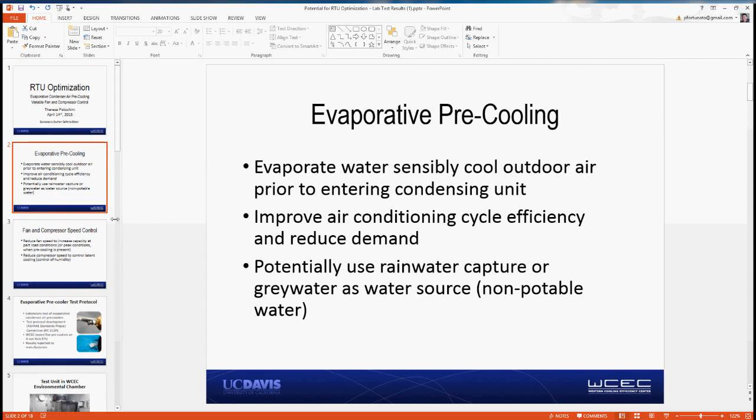Thanks, okay, next slide. So I'm sure most of the audience is familiar with evaporative pre-cooling, but just in case, evaporative pre-cooling is using water to sensibly cool outdoor air prior to it entering the condensing unit. Dropping the temperature of the air to the condensing unit improves air conditioning cycle efficiency and, most importantly, reduces peak demand.

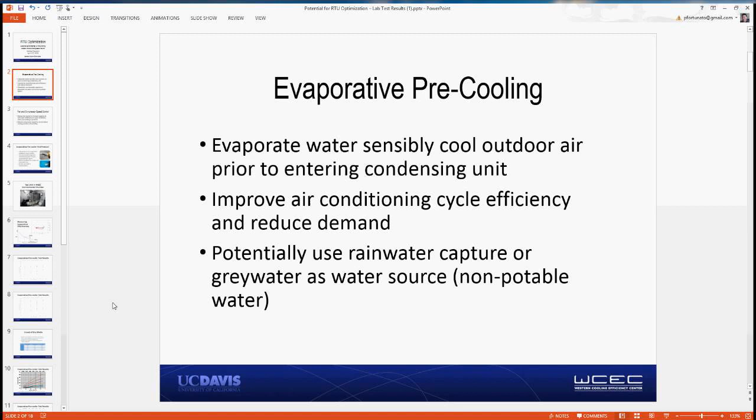There obviously in California is a lot of discussion concerning water use. And so I also just want to point out that we are doing research separately from what is being presented today on potentially using rainwater and gray water as water sources for evaporative cooling to lessen the potable water burden.

Separately from the evaporative cooling research, we have been working on a project in fan and compressor speed control for rooftop units. If you adjust the blower speed on a rooftop unit, you can—now I find a typo right here—as you reduce the fan speed of your blower, you decrease the capacity of the unit at part load conditions.

Now, if on peak conditions, you can also implement pre-cooling, you can potentially control both your fan speed; you can essentially achieve this reduction at peak conditions. And it's even more important that you can control your fan speed when you have a pre-cooler present to achieve all the benefits possible.

If you can also control your compressor speed, we're going to show that you can then also control your latent cooling. Now, in dry climates like California, what can happen is as you reduce your fan speed in an effort to reduce your system capacity, you can also increase your latent cooling, which is essentially unnecessary in our climate.

So what this project was about was looking at how you can control both your fan speed and your compressor speed to optimize your efficiency. And then we're also now considering what the potential would be if you could combine both of the technologies. So I'll go through all of our project results so you can see what that potential is.

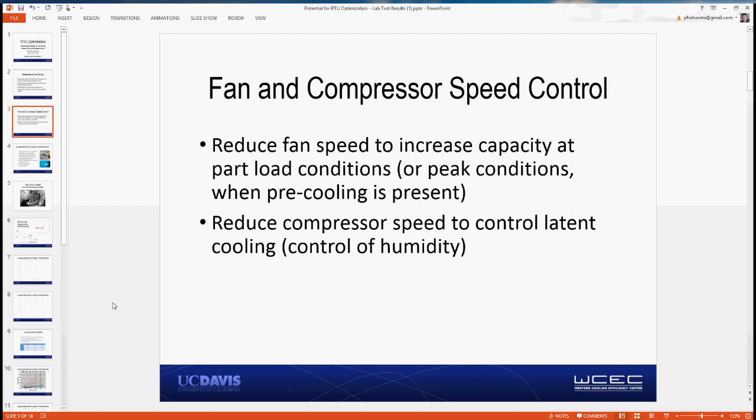Another one of our main objectives in testing evaporative pre-coolers was not just to test evaporative pre-coolers, but to define a test protocol that could objectively compare them in the laboratory. The laboratory is not perfect, and we can't look at everything one could look at in the field, but we envision it as a first cut where you could ensure a pre-cooler is going to provide the performance you need before you get out into a bunch of field installations.

Our director at the WCEC, Mark Modera, is the chair of an ASHRAE Standards Project Committee, SPC 212P, which is developing an evaporative pre-cooler test protocol.

We essentially developed a test protocol and then tested 5 pre-coolers on a 4-ton York rooftop unit in our environmental chamber in our laboratory, basically as a way of verifying the test protocol itself. As part of participating in this project, we tested equipment from 5 manufacturers, and then we provided the results to the manufacturers as well.

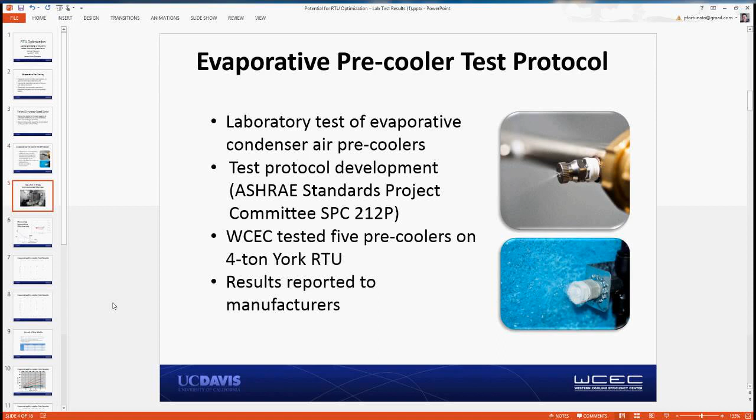So this is the rooftop unit we use for all of our testing. As I mentioned, it's essentially a brand new York 4-ton rooftop unit. I don't know if there's much else to say about that. It's installed in our environmental chamber here.

We were essentially measuring capacity of the unit - basically measuring airflow rate and entering and exiting temperature and humidity of the supply airflow and the unit power, so we're able to determine efficiency of the unit. We can also control our environmental conditions within 1 degree Fahrenheit on both wet bulb and dry bulb, and we run our steady state tests for a complete hour. So we have extremely controlled conditions coming into our environmental chamber and on the return air to the unit.

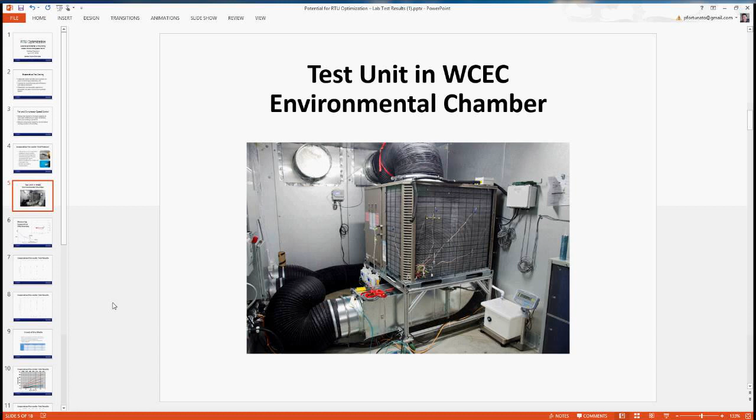Often there's no practical location between the pre-cooler and the condensing coil to actually measure that temperature. And the temperature distribution may be highly variable - so where do you place your sensor? How many sensors do you need? How do you prevent them from getting wet? Because if they get wet, all you're measuring is the wet bulb temperature. So we were essentially looking for a better way than to try and measure that temperature directly.

Another option you can look at is the exhaust condition, because if you can measure the exhaust condition, which is much more realistic, you can essentially measure the humidity ratio and then calculate what the pre-cool condition was in order to achieve the exhaust condition that you measured. So we did use that method.

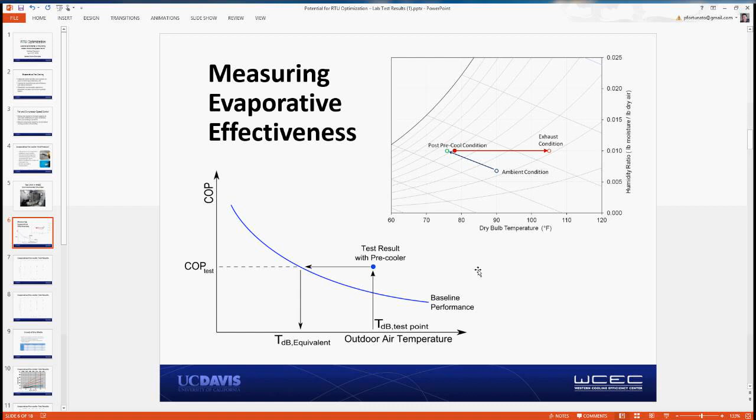These are the results of the water use effectiveness, which is basically the amount of water that would be required to get the pre-cooling delivered if you used every last drop, divided by the actual amount of water used. In all these cases, for any product that required a bleed rate, there was no bleed implemented in the lab. Pre-coolers 3 and 4, for example, are products that would generally have a bleed in the field, so they showed the highest water use effectiveness here, but we're not accounting for the bleed rate they'd require in the field, which may increase water use 10 to 30%. The other 3 products were once-through spray products and don't require any bleed, so they had water use effectiveness on the order of 30 to 80%.

One more thing to consider is that if any media is used, you may run into situations where your air conditioning cycle is running but the pre-cooler is not, which could happen at outdoor air temperatures around 75 degrees. It's probably less of an issue for units with economizers available, but it's something to be aware of. So we did an impact test, running the unit with the pre-cooler dry at 75 degrees Fahrenheit, and looked at the impact on power, capacity, and COP.

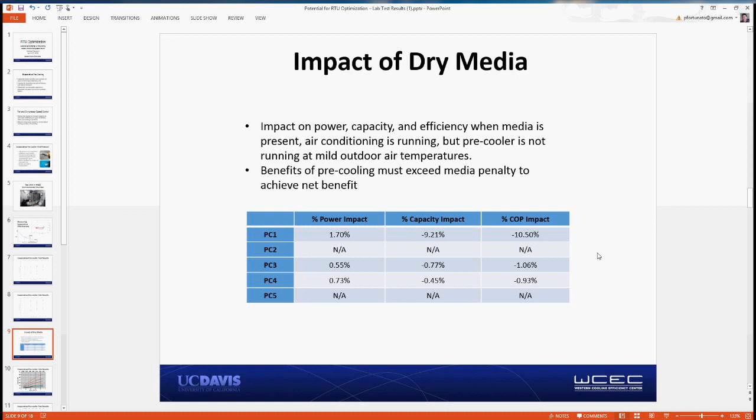Two of the products, pre-coolers 2 and 5, don't have any media in the system, so this test isn't applicable to them. Pre-coolers 3 and 4 had very little impact from the media, and the first pre-cooler was the only one that showed any significant impact. Even so, you have to consider whether the pre-cooling benefits at peak conditions exceed the media penalties at these cooler temperatures.

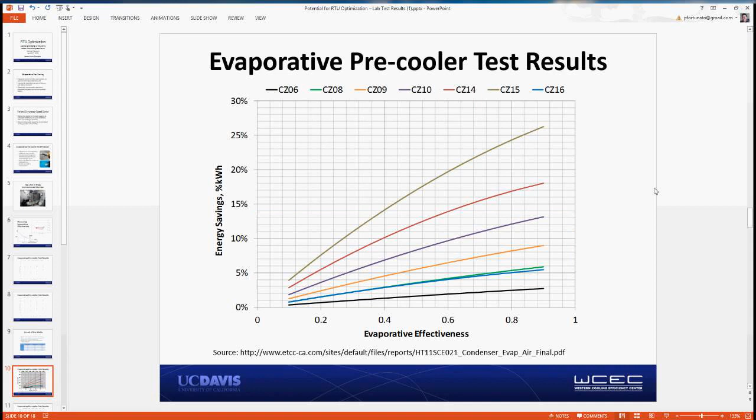I wanted to talk a little about what an evaporative effectiveness of, say, 60% means. This was a pretty detailed analysis and I can't go through all the details, but I included a link to a previously funded SCE project on the ETCC website that describes this model. Basically, we looked at various Southern California climate zones and the cooling loads in those zones, and estimated the percent energy savings achievable based on varying pre-cooler effectiveness.

If we consider that in Southern California, climate zones 9 and 10 are the most highly populated, and that based on this testing an evaporative effectiveness of around 70% is within reason, we're looking at between 8 and 12% annual energy savings.

I should also add that these results were done for an average unit, based on some DEER data on what the performance of a typical rooftop unit looks like, and for how a unit operates on average. So this is like if you replaced every unit on a rooftop—this might be the realm of what you'd expect to see.

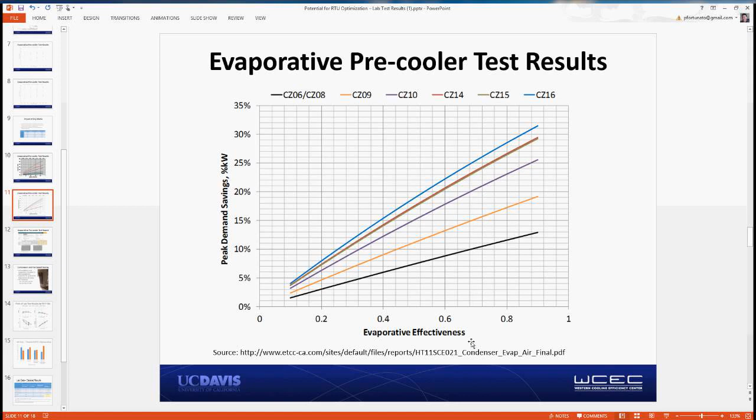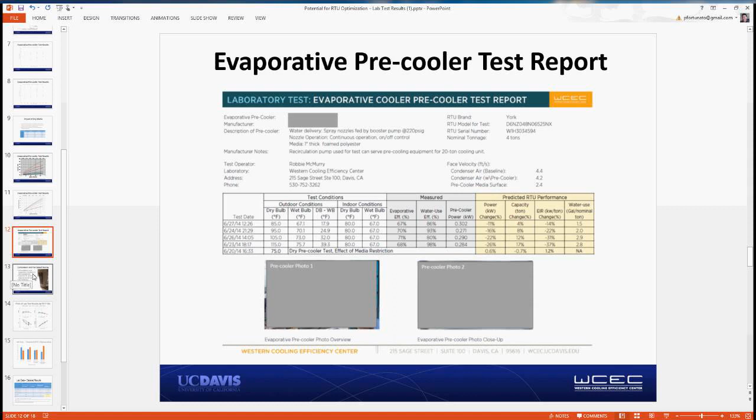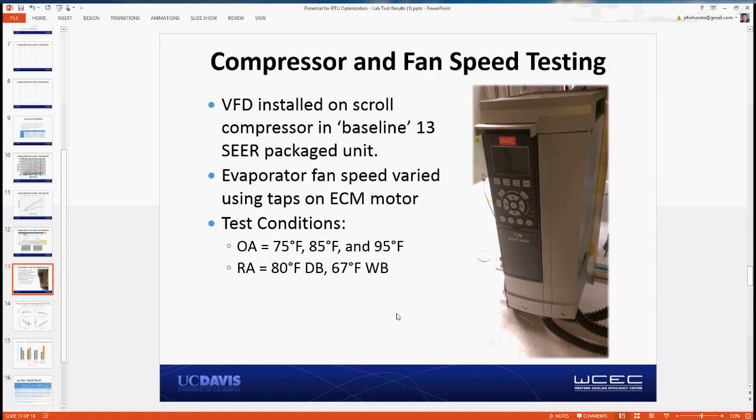Switching gears now, using the same exact rooftop unit presented previously, we installed a VFD on the scroll compressor in this 13-SEER York unit. The evaporator fan already had an ECM motor in which the fan could be varied to 5 speeds. So we ran a whole bunch of laboratory tests where we fixed the return air condition at 80/67, then changed the outdoor air temperature among 75, 85, and 95 degrees, varied the fan at 5 different speeds, and varied the VFD on the compressor to achieve 4 to 5 different speeds.

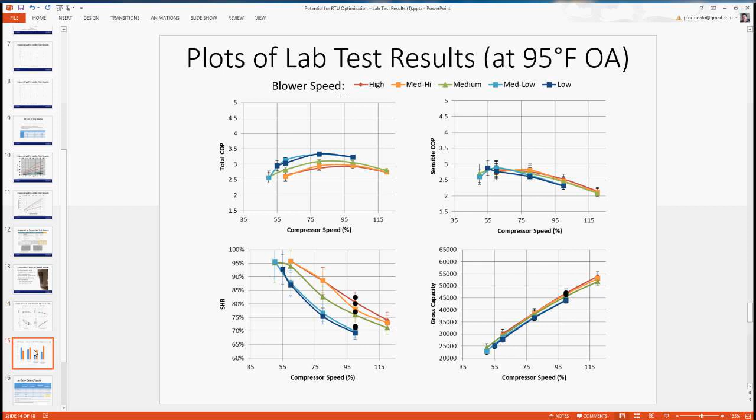So now taking all of this data, we can start to theorize what would happen in the field if you had control of your compressor and fan, and could make intelligent decisions on how to operate them with a control system, and had a pre-cooler installed.

If we take our baseline unit and optimize the fan and compressor—I should mention all of these tests were done theorizing a 95 degree day with a humidity ratio of 0.01. I don't remember my wet bulb assumption there, but it's a typical humidity for California on a 95 degree day.

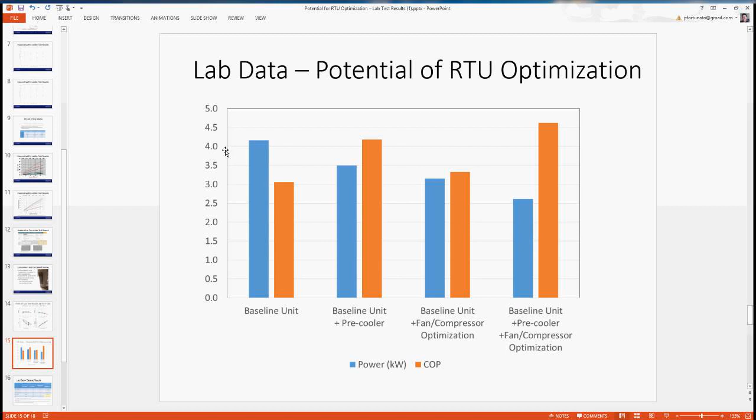I've plotted all this in a table on the next slide. These are the same results as the bar chart, but plotted in a table, so you can actually see what the numbers are.

Going from our baseline condition to our optimized condition, you can see that the power reduction is on the order of 37%, and the COP increase is on the order of 51%. In doing that, we're taking only a 6% reduction in capacity, which I think is pretty key.

Essentially, we can get a unit operating at a very similar capacity to before the retrofit, except that the pre-cooler normally adds capacity, and we use the optimized fan and compressor strategy to bring our capacity back to what it was, but at a much higher efficiency. And this is all happening essentially at peak type conditions.

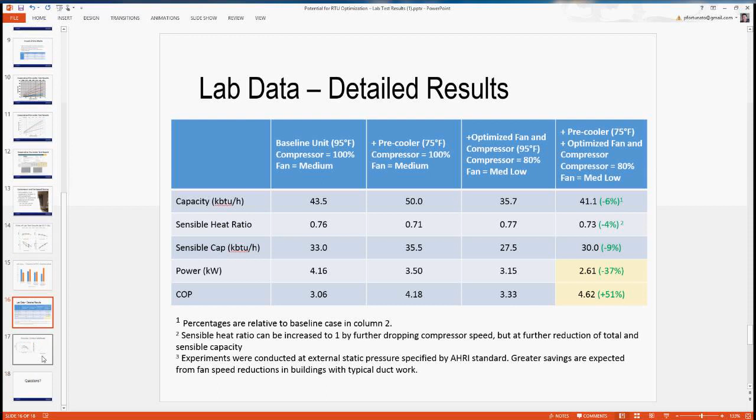We hope to do more research in this area. I think the big struggle now is that the real units on rooftops are not in the lab, and we won't exactly know what the maximum efficiency is at all times, because if you go out to any particular rooftop unit in the field, it's not going to have the same performance curves that the one in our lab does.

Based on all the data, we've been starting to think about what possible control algorithms might look like. One of the things we found is that the peak efficiency is very closely tied to suction pressure, which makes sense because that's relative to your evaporative temperature. Suction pressure is very easy to measure, and pressure sensors are very reliable, so we think that's potentially very useful. However, we don't expect the target suction pressure to be the same on every unit, because it's going to vary based on the equipment and the refrigerant used and all of these things.

We are wondering whether the optimized suction pressure could be measured at an installation. So we're thinking that when you go out to a field to install this theoretical controller, you could essentially do a field measurement of suction pressure versus efficiency.

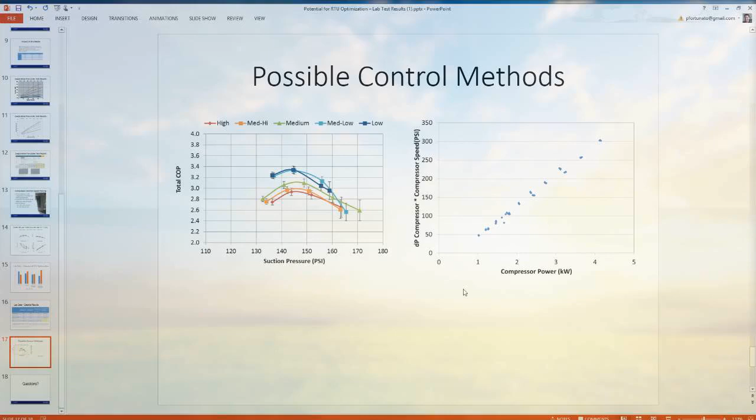And we're back. Gosh, we were on the last slide. We were so close.

So what I was getting at on the slide on the picture on the right is that in the field we could get a measurement representative of compressor power by just looking at the pressure differential across the compressor times the compressor speed. So the idea would be to develop a control product that essentially could optimize the fan and compressor, hopefully with a commercial partner, and come up with a field implementation method for that.